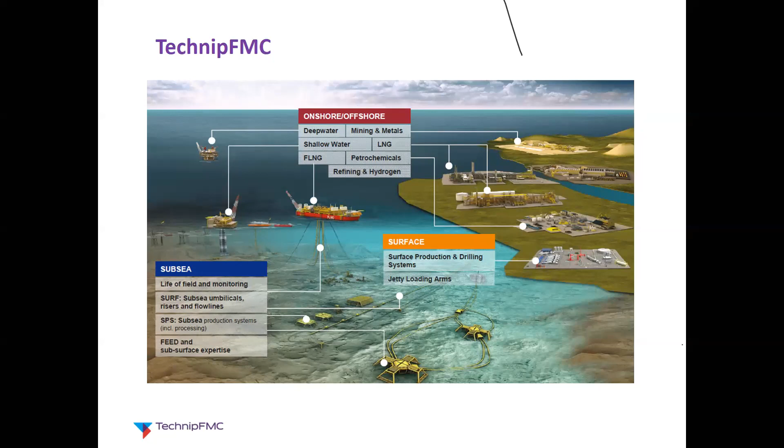We have experience with deep water and shallow water platforms, and the FLNG floating LNG ships. On the onshore side, we have experience in mining, metals, LNG, petrochemicals, refining, and hydrogen. In the subsea, that is below the sea surface, we have businesses in upstream activities like SURF, SPS, and flow lines and other things. On the surface side, again we are into upstream activities, supporting wellheads, jetty loading arms, and all those things. This is the area we are working in.

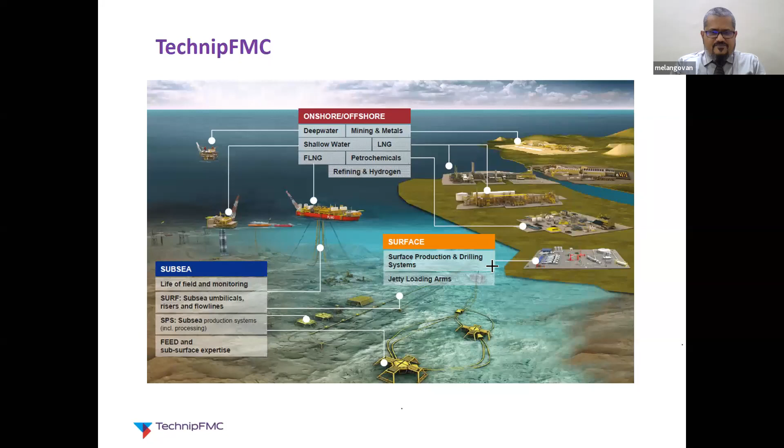Within this organization, I am in the process safety department, looking after the process safety requirements mainly for onshore and offshore projects. So this is the brief introduction for the company. Before going into the webinar, I am putting up some keynotes. This is a presentation where we are going to discuss the introduction. This is not the detailed presentation.

My intention here is to touch upon what are all the process safety activities, typical activities and tools used in the typical oil and gas project. So it will give you the idea of what is what, and it won't give you the detailed one. Given that we don't expect any calculation or exercise in this webinar, so just relax and listen to the presentation and enjoy it.

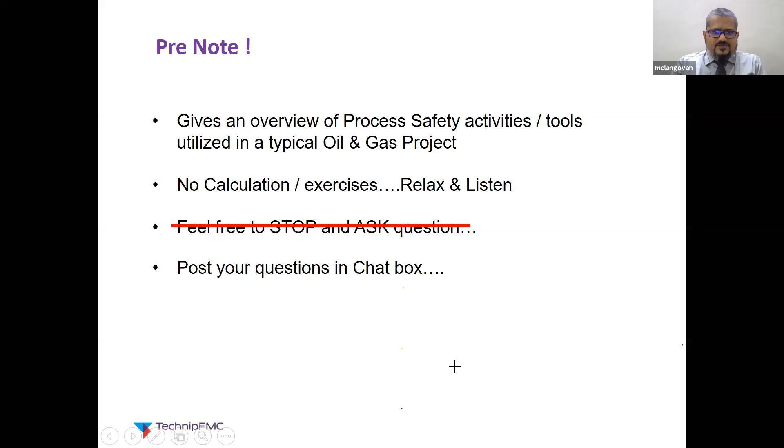So as the attendee of this webinar, what can you get out of it? So, what is process safety? You can get some understanding of what process safety is. And most of the time, people from the field and mainly from other disciplines within the engineering organization confuse process safety with personal safety. So we will give some differentiation, how process safety is different from personal safety.

And the third point, as the title says, we are going into the concepts and tools which are applicable to oil and gas projects. And to get some real-time experience, instead of explaining these tools, why don't we take up a hypothetical project example? Let us assume one project, and we will apply all the tools I am going to discuss in this webinar into that project, and we will see how best we get an understanding of those process safety tools.

So this is the takeaway for you people attending this webinar. Hope you enjoy this session. Let's get into the webinar.

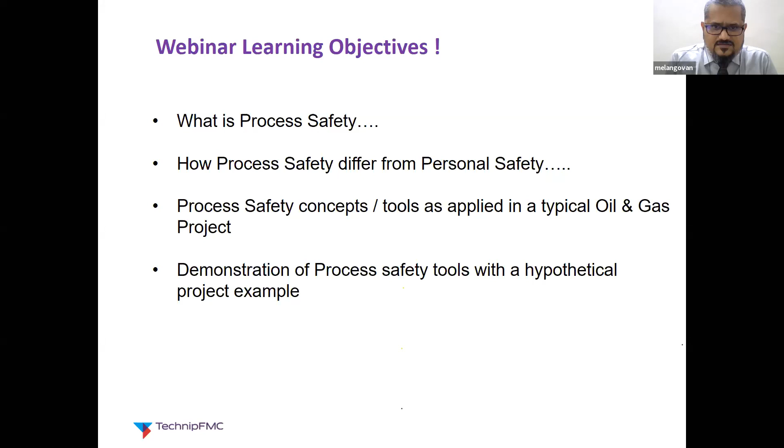So let's define what we are going to define. As the title says, we are talking about process safety. Our first point is to define process safety. So when you just Google this, if you enter 'process safety definition', I am sure you can get thousands and thousands of definitions. This will differ from country to country, organization to organization.

One of the foremost organizations on process safety is the Center for Chemical Process Safety, that is AICHE, which is situated in the USA. One of the definitions from CCPS is the protection of people and property from episodic and catastrophic incidents that may result from unplanned or unexpected deviation in process conditions. So some of the key terms here are unexpected deviation from process conditions. We are running the process for fixed process conditions. If something deviates from that, it may result in an episodic or catastrophic incident, which may result in damage to people and property. Episodic means a chain of reactions, a chain of events, and catastrophic means a sudden damage or other effects. So those incidents are considered process safety incidents. This is one way of defining process safety.

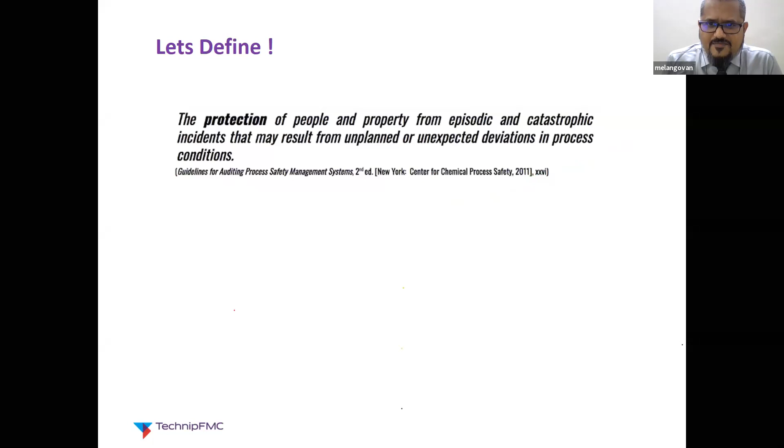To add a little more clarity, I am bringing in one more definition from the Energy Institute, a UK organization working on the HSE aspects of the energy industries. What it says elaborates a bit more on the CCPS definition: process safety is a blend of engineering and management skills. Here the keyword is that it's not only engineering—management also should have the responsibility to implement the engineering things. So it is an engineering and management discipline focused on preventing catastrophic accidents and near misses, particularly structural collapse, explosions, fires, and toxic releases associated with the loss of containment of energy or dangerous substances such as chemicals and petroleum products. The keyword here is loss of containment of energy or dangerous substances. As process safety, we are looking into the areas of how to eliminate the loss of containment of dangerous substances.

Dangerous means it may be flammable or toxic, as I say, it is a loss of containment of energy. For example, if you have a high pressure air receiver, there you have stored energy of high pressure. If something happens to that vessel, if an explosion happens to that air receiver, what will be the damage? So this is not only related to flammables and toxics, this is also related to the loss of containment of energy. So as it says, it is a loss of containment of energy and dangerous substances.

You can say that process safety cannot be applicable only to oil and gas. You can apply these concepts and tools to any industry where you are handling a dangerous substance, which may be flammable or toxic, or where you have contained energy. For example, automobile industry - yes, process safety concepts are applicable for them also because they have pneumatic systems, hydraulic systems, steam, and hopefully fuel gas for heating their furnaces and other things. So these concepts are not only applicable to oil and gas, they can be applicable to any industry where you have this condition, loss of containment of energy or dangerous substances.

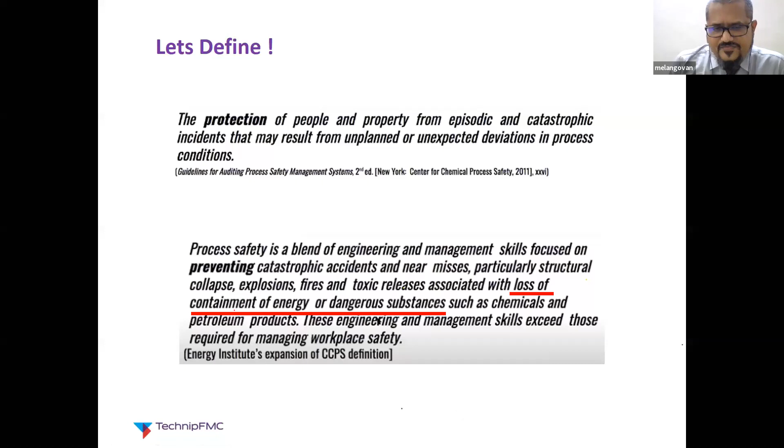I am giving you one example here. This is one cartoon showing a typical industrial activity. As you see in this cartoon, you can find a number of unsafe acts or hazards. For example, there is a chance for this spanner hitting into the person's head - he is not wearing the helmet. This cyclist is parked on the way of escape, and he is standing on the handrails. So you can list out a number of such unsafe conditions or hazards. As you see here, this will be the full list of unsafe conditions.

But can you fit these unsafe conditions into the definition of process safety? What process safety's definition says is it is loss of containment of energy or loss of containment of dangerous materials. By seeing this picture, we cannot say that all these unsafe acts are related to process safety - I say we cannot because we don't know what material is handled in this process section and what are the hazardous properties of those substances. Without knowing this, we cannot define whether these unsafe conditions fall under process safety. But definitely it is sure it is personal safety.

Given that, by seeing this picture, I can point to a couple of acts which may fall under process safety. For example, these two: here you can see that there is a flange missing. If a fluid is introduced in this vessel, that may result in a loss of containment - definitely this is a process safety incident. And here, this flange is hanging in a type of way. If this falls, this dropped object is dropping into live lines, which may result in loss of containment, then I can say that this is a process safety activity.

So by seeing this example, hopefully you can identify and differentiate what is personal safety and what is process safety. As defined, it is a loss of containment of energy or loss of containment of dangerous materials - so this is a key takeaway. Hopefully hereafter you can clearly distinguish what is process safety and what is personal safety.

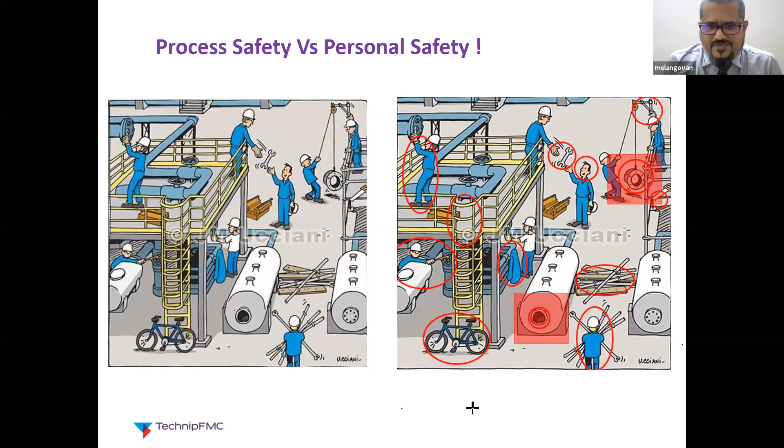I need to fix up what is the capacity of my plant, what are the very basic things, what area of land I require, what is the key equipment for those things. Then the project moves into basic engineering, where some more detail is added into the design, and into the detailed design stage, where everything is fixed up, frozen - the design freeze stage. Then it goes to construction, then commissioning, and after this commissioning, it is handed over to the owner, who is the operator of this plant. The operation is then going on.

After some time, the owner may need to introduce a new product, increase capacity, or address design flaws that occurred in the basic or detailed engineering. Then he goes into the modification phase, where improvements to the plant, asset, or product portfolio, including new products, take place. So this is a cyclic activity of operation and modification.

For every plant, there is a phase where it needs to be decommissioned, because we cannot foresee the demand for the product indefinitely. Generally in oil and gas industry, we design the plant for 20 to 50 years - this is the general philosophy. That means we design the plant to withstand up to 50 years. After that, they need to go for improvement, or decommission and build new. So this is how the typical cycle goes.

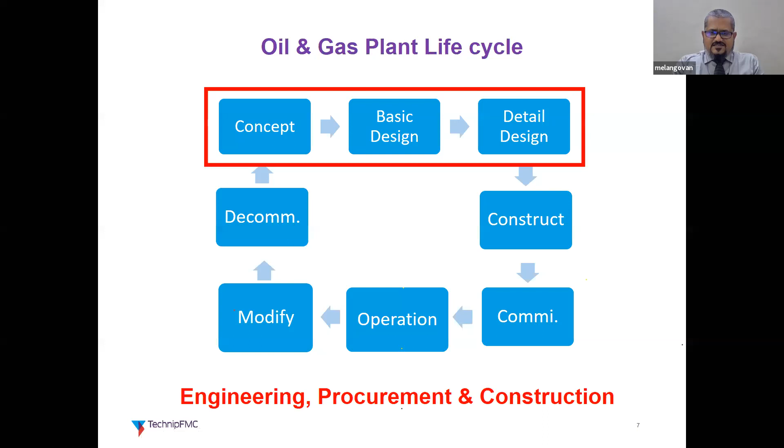Given that, with the title Process Safety Aspects in Oil and Gas Projects, as I am from an engineering company, the whole webinar will concentrate on these three steps of the EPC project: the concept stage, basic design stage, and detailed design stage.

So what are all the process safety aspects typically applicable for oil and gas projects? We will start with the concept stage. The very first thing we implement for the project at the concept stage is ISD review - that is the Inherent Safety Design Review. We will discuss this further in the coming slides.

The next will be HAZID and ENVID, which is typically taken care of in the basic design stage, along with HAZOP and LOPA. This can be taken up in basic engineering as well as detailed design stage, and QRA generally at the detailed design stage. These four things are typical review procedures - what I'm saying is the review procedure assesses how safe the plant we are designing is.

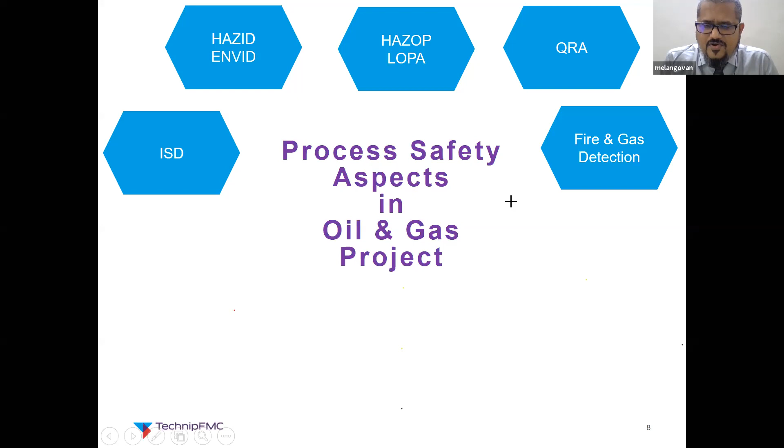Apart from these review procedures, we have fire and gas detection, which is an added protection layer - we'll discuss these things. And hazardous area classification, active fire protection, passive fire protection, engineering control of noise, safety layers - this will give an overview of all the safety concepts applied in oil and gas projects. We are going to discuss all these key elements in subsequent slides.

As I told earlier, we are going to discuss these key elements with the help of a hypothetical project. I am not going to explain this to you as theory - we are going to apply this concept in a sample project. So, are you ready to handle your project, a typical sample project?

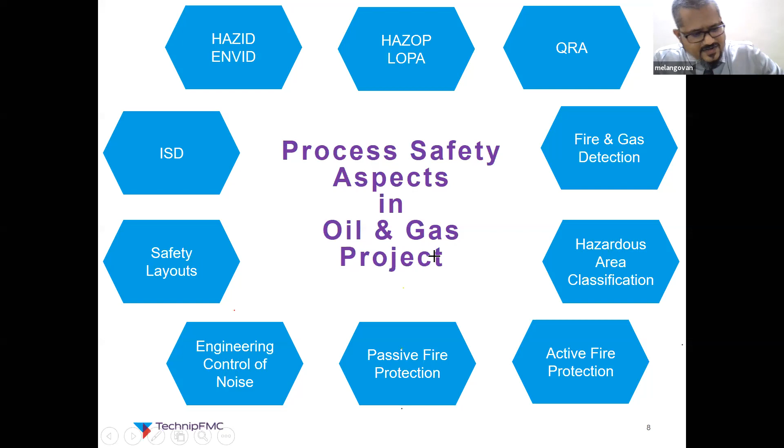Okay, so we have a client who has a plan - he has the idea of putting up a diesel storage system. The task: design a facility to store diesel fuel in bulk and distribute it to various end users. End users means where this diesel is going to be used - typical examples may be the diesel generator, boiler, incinerator, etc. within the plant. So this is the requirement.

Let us assume this is a typical oil and gas project, and this is the client requirement, and we are going to design a safer plant by applying the process safety concepts discussed in the previous slide. Once this requirement comes into any EPC company, the first person to get into the job is a process engineer, who speaks to the client, assesses the requirement, and comes up with the very basic things.

Okay, so now we are entering the concept phase. So what do we have - the client is asking for storage. Typically we need a storage tank for the diesel, which is going to be distributed to multiple end users. End users may be distributed across the plot plan at different locations, so we should have some source to generate pressure so that we can deliver the diesel to the end users.

So obviously we need to have the inlet to the diesel, where we are getting the diesel. And as I told, we need to have the distribution pump and the pipe network to distribute the thing to the different users. So this is a concept stage.

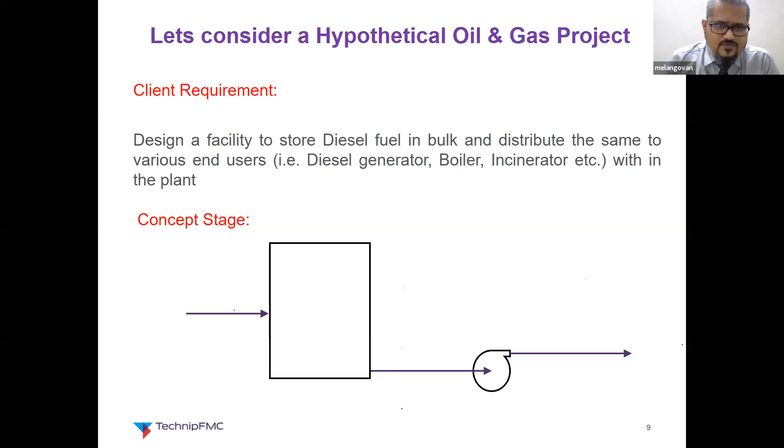We have the inherent safety design review. Let's go for the review. So what is inherent safety? A process has inherent safety if it has a low level of danger, even if something goes wrong. Okay, this is the definition.

There is one very good proverb: if you don't have anything in your pipeline, there is nothing going to leak. That means if your residual risk itself is very less or negligible, then there is nothing harmful going to happen even if something leaks. Okay, this is the concept of inherent safety.

That is minimization. For example, what minimum volume of the tank? This diesel tank can be sized to store diesel for 1 day consumption, 1 week consumption, 1 month consumption, or 1 year consumption. There is no limit for the capacity of the tank, but the risk for each case is different.

For 1 day, for example, it is 100 liters, whereas for 1 week it will be 700 liters. So if a leak happens, in both cases the consequence will be different. For the first case, at worst, we may have loss of containment of 100 liters of diesel. But in the second case, we have loss of containment of 700 liters of diesel. So we need to agree on what minimum size of diesel tank we can have to satisfy the end client requirements.

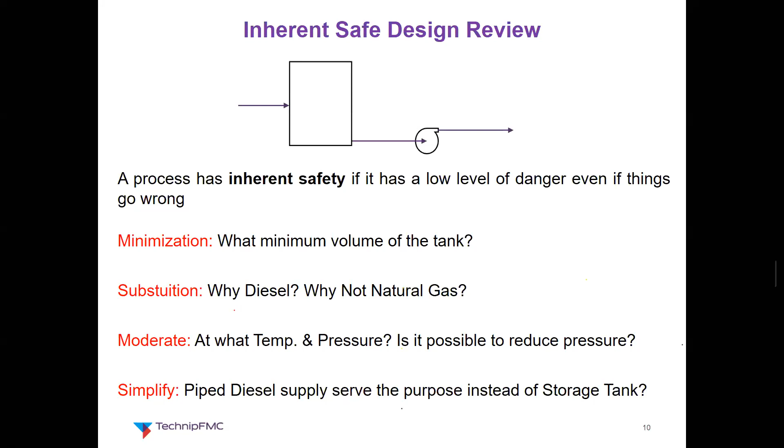Simplify. Again, why do we need this tank and the pump? Why don't we use a distributed pipeline from the source itself? Are we able to eliminate the storage tank or the pump? Is it possible? Because unwantedly we are storing the flammable, combustible material in the bulk storage tank. Are we able to eliminate this thing?

For example, minimization. From the news, you may understand that the tank is around 2,000 or 3,000 liters capacity. Why is such a huge tank required? This huge tank resulted in the prolonged release of styrene. Why is the styrene required? Is there any alternative?

Moderate. What is the temperature and pressure, the operating temperature and pressure of the storage tank? Simplify. Why do we need that intermediate storage tank? Whether we can have the pipe supply of styrene from nearby. This depends on the source where the styrene is coming from.

So this is the way. This ISD, the inherent safety design concept, can be implemented in any project. As I recall again, this concept can be applied to any industry, not only oil and gas. If you take the automobile industry, the same concept can be applied there. So likewise, for any industry it can be applied.

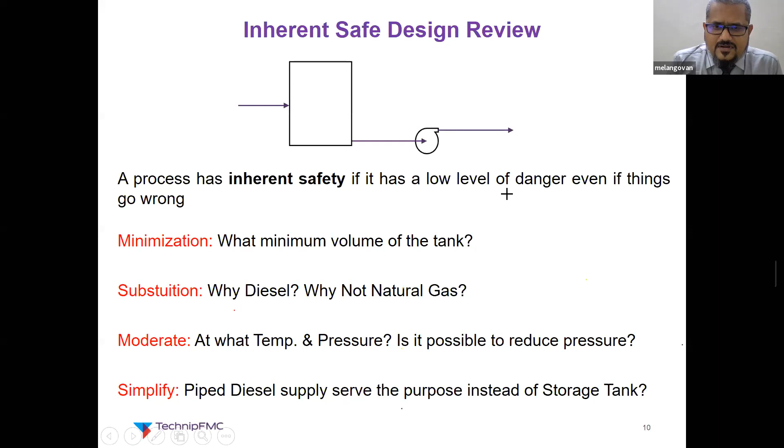Okay, good. We have the ISD workshop completed, and our process engineer is happy. Now the project is moving into the basic design, and our process engineer added some more details to the project. So this is what we have at the basic design. You can see the difference.

I'm just bringing in the concept stage drawing what we had. Now you can see how the project progressed in terms of design. In the concept, we only have the inlet line and the rectangle box with the pump. Now we have a number of improvements to the design. We have decided the tank type will be a simple cone roof tank, and we have added a number of lines and attachments. So this is how the project developed from the concept stage to basic engineering.

Now, perfect. Process engineer comes to me again and asks what improvement can be done from the process safety perspective. Yes, you can do HAZID and ENVID. Okay, let's do it. What is HAZID?

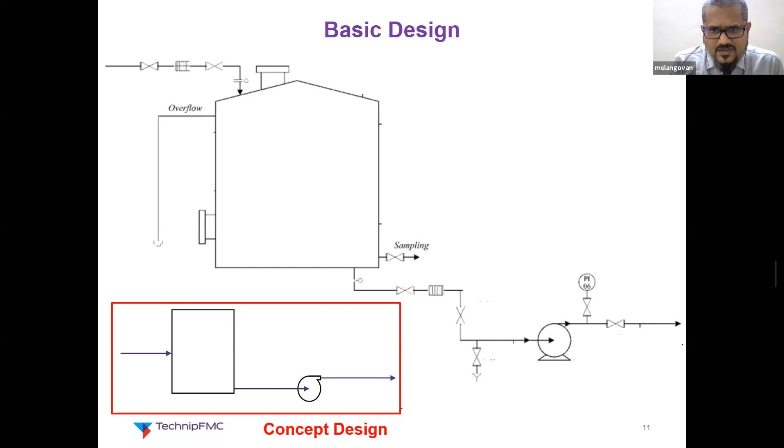The purpose of the HAZID study is to identify the hazards present in the current design and the potential consequences if the hazards are realized. So again, we need to approach this HAZID as a keyword concept.

It is a guide word review. We have a set of guide words from the codes and standards as well as the operating company's procedures. Accordingly, we need to do brainstorming. But when compared to the guide words used in HAZID versus ISD, it is totally different. The ISD concept is to eliminate the hazard itself; here it's to manage the hazard.

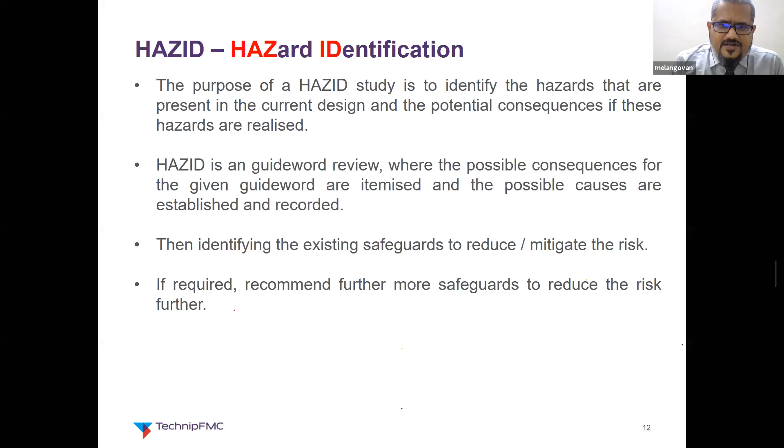That's the way we need to have these guide words. When it comes to ENVID, it is similar to HAZID, but the guide words are more related to environmental hazards, the impact to the environment.

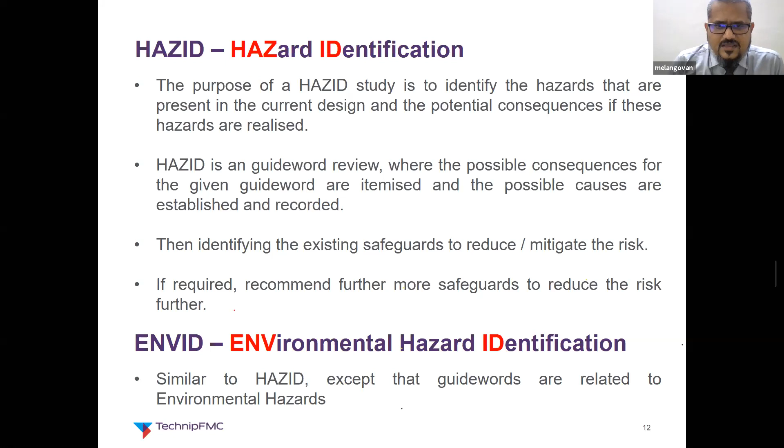Okay, for our case, let's do a HAZID for a simple one guide word. So this is the typical set of guide words we use for HAZID. I'm just giving four. There is a full list of guide words - you can refer to any client document or ISO standards to get the total list of HAZID guide words.

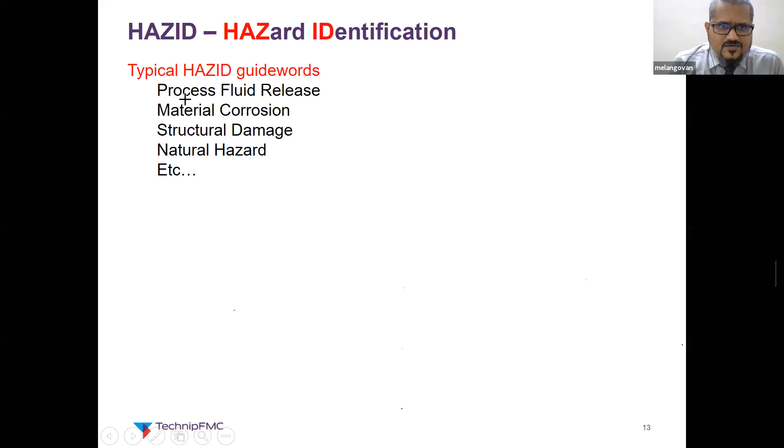Let us talk about process fluid release. So this is a typical HAZID worksheet. The guide word we are talking about is process fluid release. So what may cause this fluid release?

One brainstorming point is rupture of the tank due to corrosion, which may lead to loss of containment of diesel. What is the consequence? Diesel tank rupture will result in loss of containment of diesel, and upon ignition will result in a fire accident. So the loss of containment of diesel won't immediately result in a fire incident.

It should have your ignition source so that it will get into the fire. So what is the safeguard we have to prevent this cause and consequence? At present, based on our basic design, we don't have any safeguards.

So what is recommended? The existing safeguard I can say is the material of construction of the tank, which will be suitably selected, and we have given the corrosion allowance and above the design thickness what we arrived at. So that is one of the existing safeguards we can consider here.

And the recommendation to prevent the consequence: we can provide a bund around the tank. In the current design we don't have the bund, so if the tank collapses, the diesel will spread across the platform until the content is exhausted. But if we have the bund around the tank, we are containing the release within the bund. It is not spreading beyond the bund.

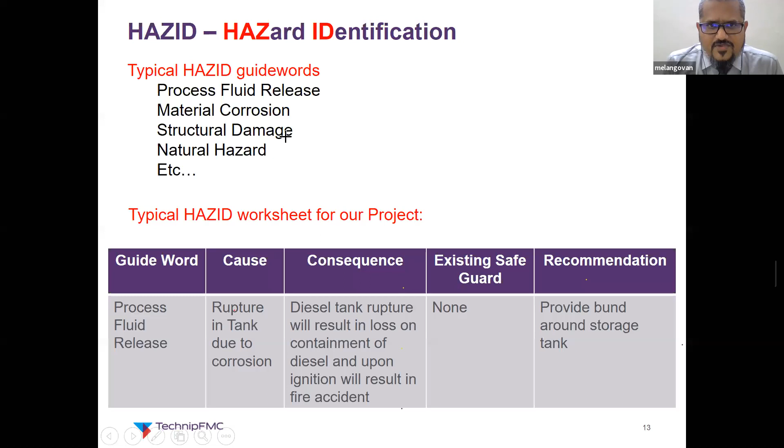And what are the safeguards we have? What is the recommendation? The way we need to brainstorm is for the assets and people and property, as well as the assets for the environment. This is how we are progressing with it.

He had included the level transmitter, the level indicator to measure the level. And he had included the level switch low alarm, as well as the tag numbers here. You can see how this project has progressed from the basic design to the detailed design here.

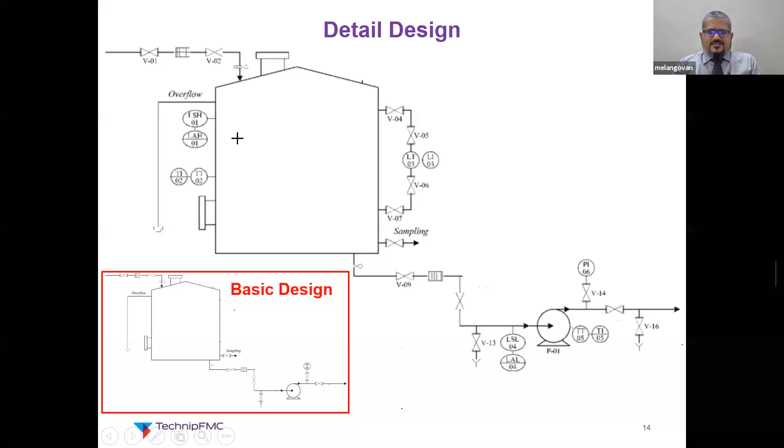See, in the basic design we don't have that - that is not the actual case. I'm just giving you this example to show how the design is progressing. So the main concept is, from basic design to detailed design, the level of engineering detail will be increased. That is the whole concept.

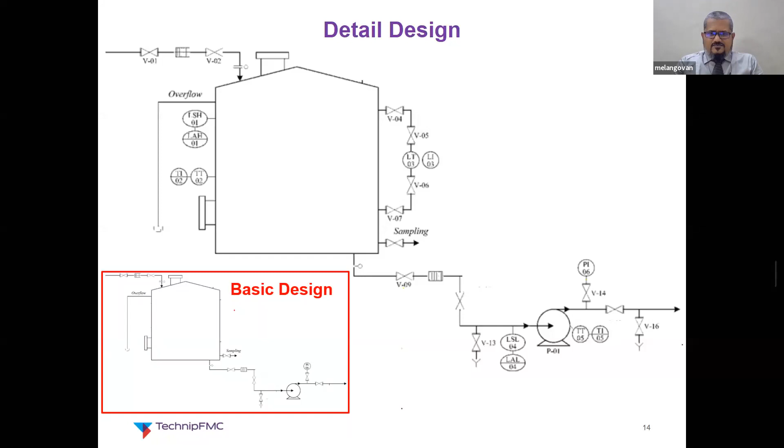So perfect, we have the detailed design. Now, what process safety improvements can I do with the detailed design? Good - we have the HAZOP. Let's do the HAZOP for this process plant at the detailed design stage.

What is HAZOP? HAZOP is called a hazard and operability study. There are two keywords here: hazard and operability. This review not only looks into the hazard but also looks into the operability issues. For example, if I have a strainer on the suction line of the pump, how can I do maintenance for the strainer? What provisions have been given in the design for doing the maintenance? So all those operability issues are also discussed in this. That is the main difference between HAZID and HAZOP.

Okay, in HAZID we look into the hazard perspective; we are not looking much into the operability perspective. But in HAZOP we will look into both hazard as well as operability. So what is HAZOP? A systematic comprehensive analysis of plant design to identify the design gaps which may lead to either safety or operability problems. During the study, the HAZOP team will use a guide word.

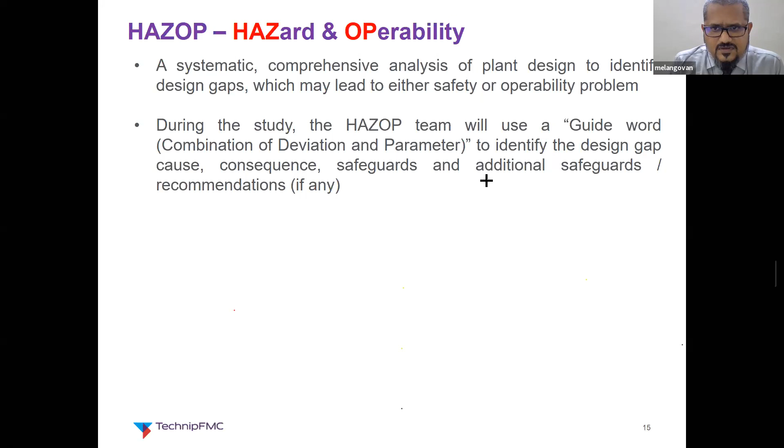Again, it is a guide word, but here the guide word is more narrow. Here the guide word is a combination of deviation and parameter. We are going to see what the deviation and parameter are, to identify the design flaws or the cause, consequence and safeguards. So what is the guide word for HAZOP? How is it structured here? This is the deviation.

So what are all the deviations we can consider, and these are the parameters. Guide word is a combination of deviation and parameter. For example, no flow - that combination is a guide word. Likewise, less flow is another guide word, or more flow, reverse flow. The second parameter is temperature - no temperature won't apply, since there won't be any no temperature, it will be either less temperature or more temperature. Likewise pressure, less pressure or more pressure. Likewise level, less level or more level.

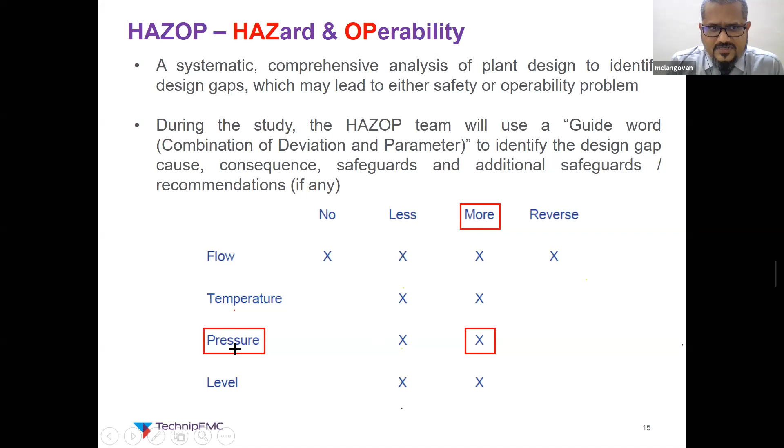So we have the set of guide words now based on the combination of deviation and parameter. Let's do a sample HAZOP for the system we are doing. Let's say we can select more pressure as a guide word. So this is my HAZOP worksheet for the guide word more pressure. So what may cause the more pressure?

I am studying the tank as a node. Before doing this HAZOP study, we need to split the whole process scheme into nodes, so that the HAZOP study will be streamlined, because doing the HAZOP for the entire plant may be too difficult. In our case it is a simple one - inlet line, the diesel tank, and outgoing line. But think about the whole process plant, it will be too difficult. So we need to break the whole process plant into nodes. For each node, we need to apply these guide words.

For example, in our case I am taking the diesel tank as a node, and I am applying the guide word of more pressure to that node. So what may cause more pressure within the tank? For example, while pumping diesel into the tank, the incoming line to the diesel is kept open, diesel is getting into the diesel tank. So what happens? Automatically the vapor space within the diesel tank gets reduced by rise of liquid level, which will result in the increase in pressure within the tank. So for more pressure, the cause will be pumping in diesel will result in more pressure.

So what is the consequence? If I don't have any safeguards, let's see the consequence. Diesel tank may rupture if tank pressure exceeds design pressure. The tank is designed for some design pressure, meaning the tank will withstand up to that pressure. If the operating pressure exceeds that pressure, there is a chance the tank will rupture, which may result in loss of containment. The rupture will result in loss of containment of diesel. Upon ignition, this will result in a fire accident.

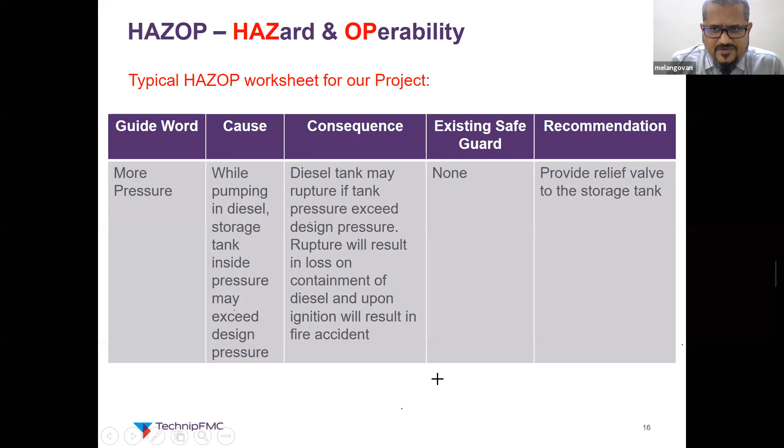So likewise, we need to go through the entire guide words, and we need to brainstorm what is the cause, what is the consequence, what safeguards we have. If we don't have adequate safeguards, we can recommend additional safeguards. This is how HAZOP will proceed. So we have done the HAZOP, and we have improved the process safety of the plant design. And further, we have LOPA, which is called layer of protection.

What is it? This is the concept of protecting the plant by means of an onion model. At the heart of the model is your process design. The very first protection layer is your basic design. For example, in our case we are designing the plant to store and distribute diesel. So what basic design have I followed? I have selected the correct material of construction compatible with the diesel, and I have gotten the correct design pressure to overcome any overpressure scenario, and I have selected the distribution pump to minimize leaks from the seal - I have selected the double mechanical seal distribution pump. So these are all the basic design elements which I have incorporated to prevent any accidents.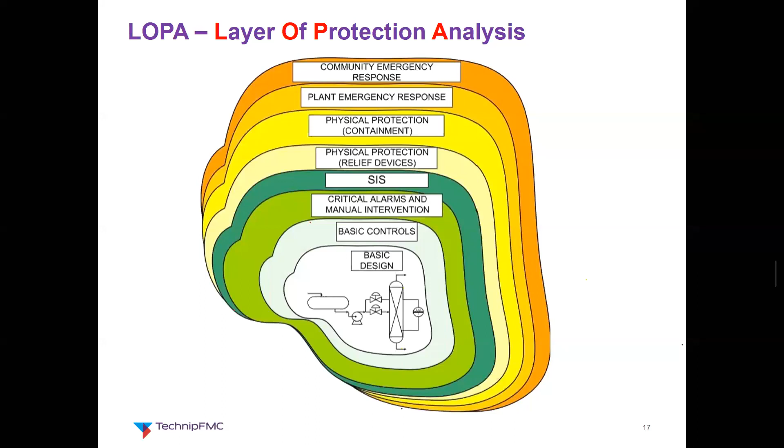So above the basic design, what is the next level of protection? That is the basic controls. Recall that P&ID I showed in the detailed design stage - we have implemented temperature transmitters, level switches, and all this. These are all the basic controls which will keep the process within design limits. And the next level, there are critical alarms and manual intervention. If something goes wrong and this automatic control system fails, the basic control fails, what will be the next level? We have the alarm systems - there is a high level alarm which will alert the operator, prompting operator intervention.

So likewise, we have the low level alarm which will give the protection for the pump against dry run. This is the next level of protection. Above that, we have safety instrumented systems.

What is a safety instrumented system? This is again an automated system, but it is independent of the basic controls. The basic control in our case is the level indicator transmitter within the tank, which will control the level. Above that, we can implement the independent control loop that is called safety instrumented system. If something malfunctions within the BPCS system, this SIS will come into the picture and shut down the system. So that is called safety instrumented system.

And above that, we have the next protection layer. There is a physical protection by means of relief devices to avoid any overpressurization of the tank. And the next level, physical protection again, there is a containment system. As you recall, during our HAZID, we have implemented the dyke.

And above all, if something happens, the loss of containment happens, which may result in fire or dispersion, whatever the thing, what is the emergency response we have within the plant boundaries? That is called plant emergency system. If the consequence is going beyond the plant boundary, there is a community emergency response system.

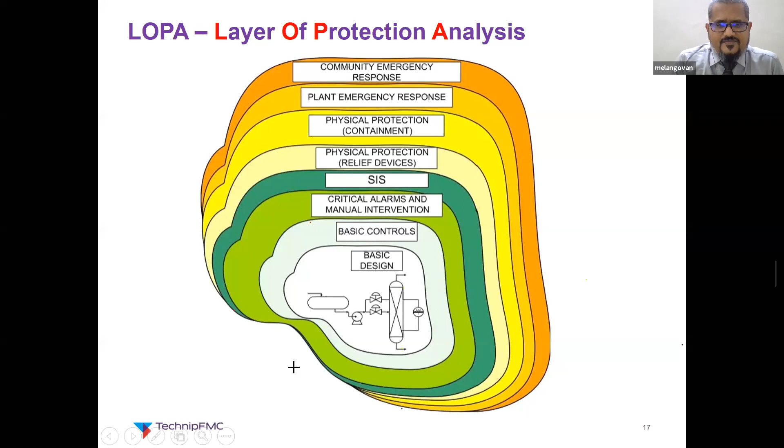So that's where we are getting into the consequence analysis. In our case, for example, with all these protection measures, let a leak happen - the diesel leaks. Then further, what may it result in? It may result in a dispersion, meaning the diesel which leaked out of the system may vaporize and result in a flammable gas cloud.

And a pool fire, if the diesel is ignited, it may result in a pool fire. Jet fire, if the diesel leak is happening as a jet instead of a pool - for example, if the diesel leak is happening on the discharge side of the circulation pump, which is at high pressure, then it will be released as a jet. So if it is ignited, it will result in a jet fire.

And explosion - if the released diesel vapor cloud gets ignited as a cloud, what will be the explosion? In the dispersion, we have both flammability as well as toxicity. For example, again referring to the Vizag incident, the styrene is flammable as well as toxic. Fortunately, there was no fire incident in that accident - it was only the toxic cloud. So we need to assess all these things.

So how are we going to assess this? We have sophisticated software for doing this job. One of the software is PHAST.

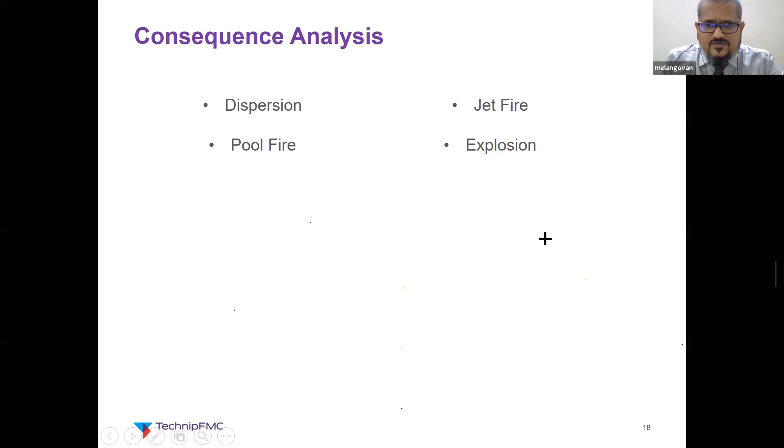Based on this overpressure, we need to locate our buildings and other vulnerable objects outside this explosion overpressure criteria. This consequence analysis will help you plan your plant emergency system as well as community emergency response systems. For example, if your consequence says this distance for dispersion, pool fire, jet fire, explosion, and all this distance is within my plant boundary, that means it is not traveling beyond the plant boundary.

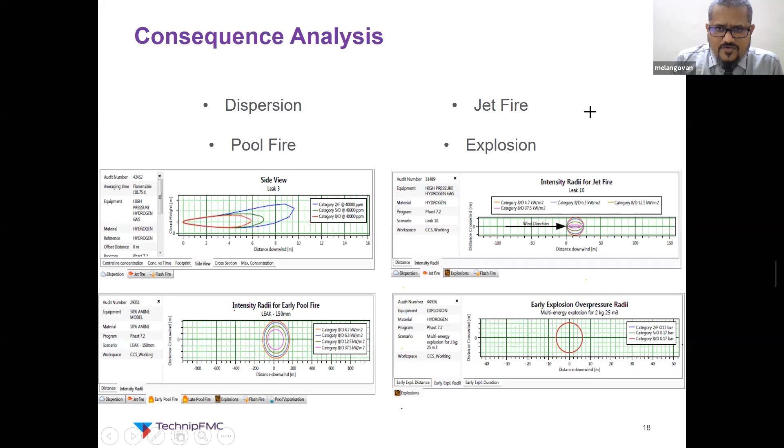So we need to develop the plant emergency response plans accordingly. If it is going beyond the boundary, we need to look into the community emergency responses. With this, we are moving to the next concept.

By saying quantitative, now we are getting into numerics. Up to this point, from the start of my presentation, I have been speaking generic terms - hazard, dispersion, fire - but not in terms of numbers. For example, if fire happens, how much distance will you see the radiation of so-and-so level, or how much distance the LFL will happen. And again, if a fire happens, is it affecting people, and if so, how many people are affected? Those things will be dealt with in the quantitative risk analysis or assessment.

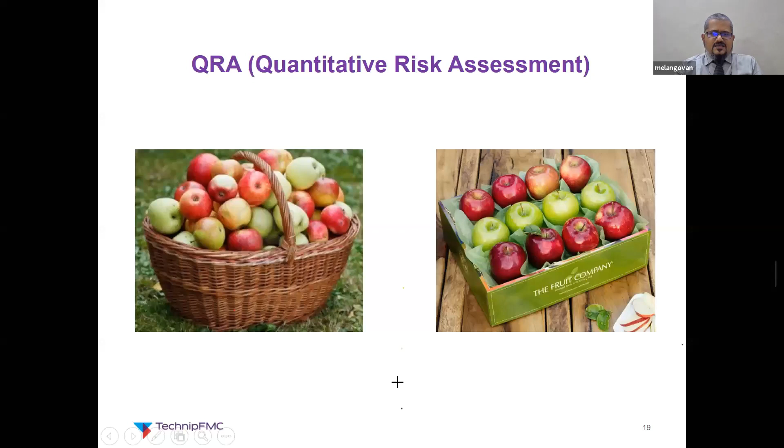So what is this QRA? QRA provides a numerical measure of the risk a facility or operation poses to the public, to site workers, or on-site and/or off-site equipment. So by definition, risk is a function of frequency and consequence.

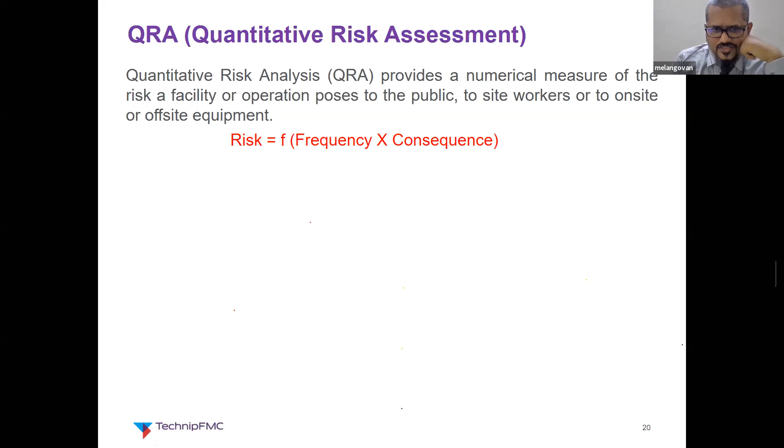Consequence, as discussed in the previous slide, is a function of the properties of the material handled. For example, is it flammable or toxic? If it's inflammable, what is its flash point? Is it easily ignitable or less ignitable? Likewise, leak hole size - what is the hole size where the leak is happening - and isolated section volume. For example, if we assume the leak is from a diesel storage tank, what is the capacity of the diesel storage tank?

If you recall, at the start of the webinar, I mentioned that if the tank is 100 liters capacity, the consequence will be less. If it is a 1000 liter capacity, the isolated section volume is high, so the consequence will be severe. Consequence is a function of all these things. I've listed a few here, but likewise a number of other things are there.

Likewise, frequency is a function of leak frequency. For example, the diesel tank leakage - if a leak happens, how frequent can it be? What are all the leak sources? All these things will be assessed in the leak frequency.

Once a leak happens, it doesn't get ignited every time - we should have some probability of ignition. It may ignite or may not ignite depending on a number of factors. Likewise, there's the probability of human presence at the time the event occurs. Even if it is ignited, does it affect the person or not? That depends on whether the person is standing at the time the fire is happening, or is stationed somewhere away. A number of factors need to be studied to get into the risk.

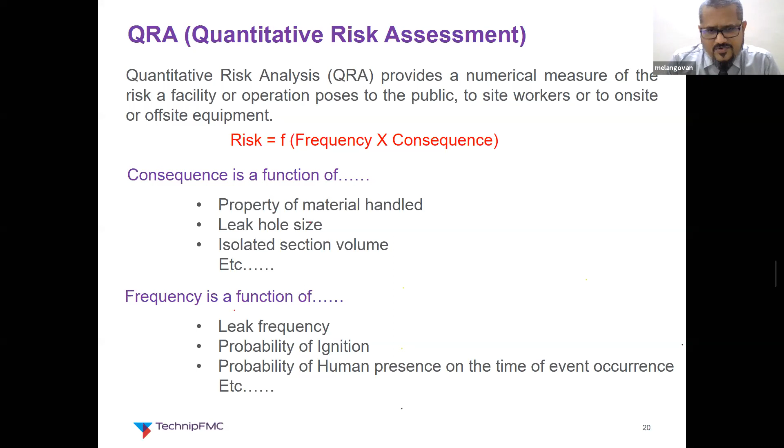So what I did is include the ESD valve - emergency shutdown valve - which can be activated during the leak scenario. For example, let's assume there's a leak happening downstream of this line. If you don't have this valve, it will just continue, because these valves are manual valves. Remember the Jaipur incident, the IOCL Jaipur incident, the tank pump incident - they had valves, even motorized valves, but they needed to be activated on site. It cannot be activated remotely from the control room. A person needs to go to the site and push the button.

Unfortunately, before that site activation happened, the diesel released from the tank had formed a flammable gas cloud, so no person could enter the tank area. So what happened ultimately? The entire tank content leaked out, which resulted in a massive fire incident - a costly lesson learned for India.

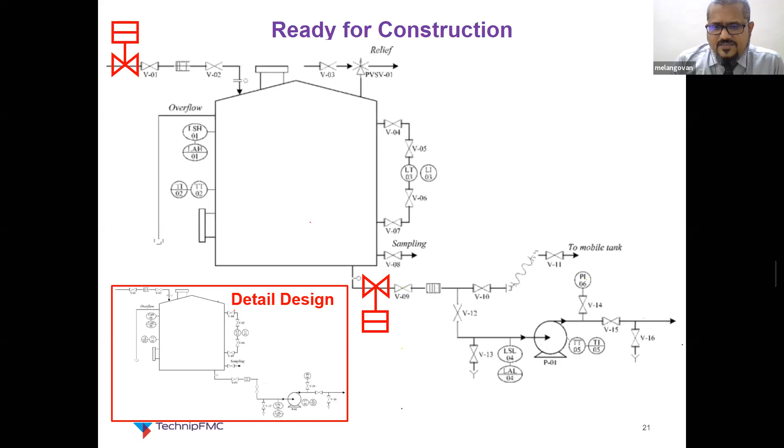This is how the project matures from concept to construction, incorporating process safety aspects and tools - but these are all review tools. Apart from that, up to this point we've concentrated on how we can avoid the loss of containment, or how we can avoid hazardous events. But there are some more layers available to minimize the consequence. With all these protection measures, if something still happens - some loss of containment - how can I minimize the consequence effects? That's what we're going to discuss further.

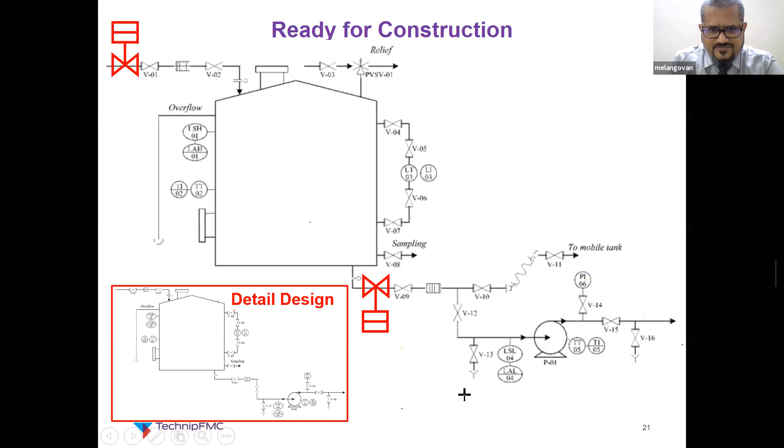The first thing is the fire and gas detection system.

So whenever there is a leak, the very first protection layer in place is the fire and gas detection system. If it is a volatile component or a gas, we have gas detectors which will give an alarm to alert the operator. Or if it is converted into fire, then we have fire detectors.

Now let us implement these systems into our design. Before that, we have listed down all the detectors available. For fire, we have three types: flame detectors, smoke detectors, and heat detectors.

Flame detectors work on the principle of optics, by seeing the flame. Smoke and heat detectors are based on the product of the fire. The product of fire is smoke, so if there is smoke, there is fire. Likewise, if you measure heat, there is fire. So these two detectors are based on the product of fire, while the flame detector detects the fire itself.

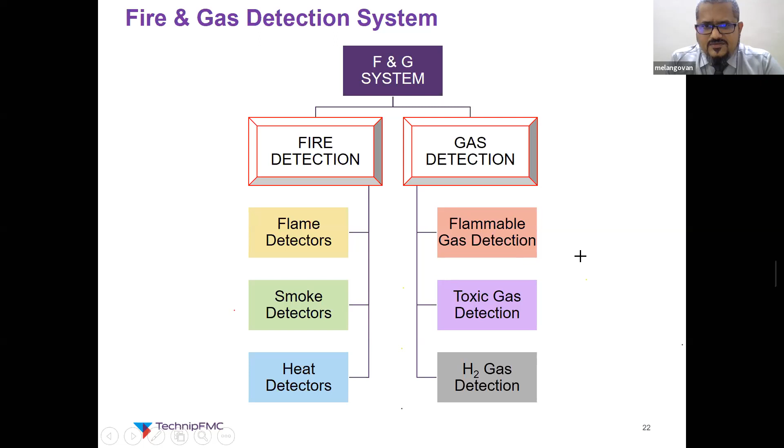Likewise, for gas detection, we have flammable gas detection, toxic gas detection, and H2 gas detection, or any specific gas detection we can implement. So now, how do we implement this into our system?

We have this ready for construction plan. Now I am going to implement the detectors. First I have implemented flame detectors: two to cover this tank, and two for this pump. Why? This is a possible leak source, the mechanical seal and other things. This is a possible leak source where we have an overflow line. That's why I have placed my detectors around these two possible leak sources.

Likewise, I'm placing my gas detectors, again on the pump, which is a possible diesel leak source through the mechanical seal of the pump. This looks simple for this system, but for a whole process plant it will be a laborious job, requiring expertise and skills for placing these detectors.

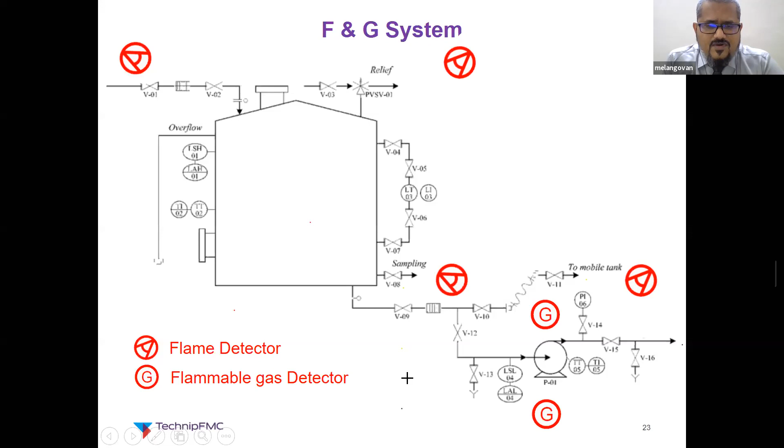Okay, what next do I have? Hazardous area classification. What is it? If a leak happens and the fire and gas detector fails to act or detect somehow, there is a next consequence: maybe the flammable cloud may get into a fire.

This is a typical fire triangle. Everybody knows about this, hopefully. For any fire, we need oxygen, fuel, and an ignition source. Fire is a reaction between fuel and oxygen, an oxidation reaction, you can say. To initiate that reaction, we need an ignition source or energy.

So what are we going to do with hazardous area classification? For any process, we cannot eliminate fuel and oxygen. For example, in our case, diesel is a combustible material, a fuel. Our whole purpose of the plant is to handle this diesel, so we cannot eliminate it. Likewise, oxygen is everywhere in the atmosphere, we cannot eliminate that either. So the only possible thing is to control the ignition sources.

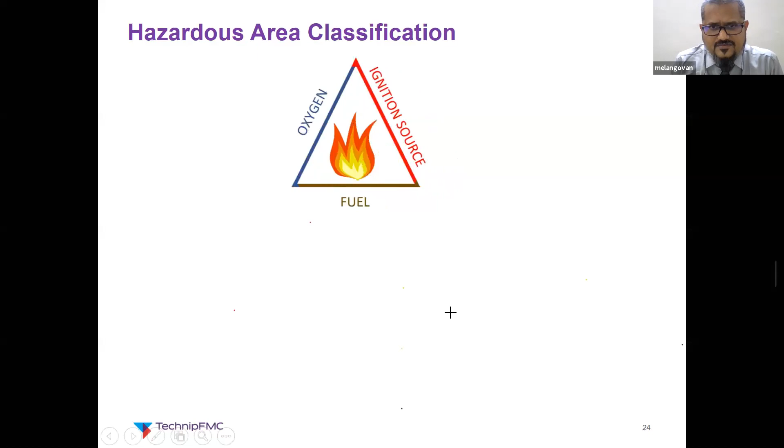So how is this ignition source related to hazardous area classification? First let's look at the definition. What is hazardous area classification? A hazardous area is defined as a three-dimensional space in which a flammable atmosphere may be expected to be present.

So what we are going to do is define what may be the flammable atmosphere around my system, based on the material I handle, its flash point or physical properties, and the operating temperature and pressure. So I am defining the flammable three-dimensional atmosphere around my system, and then I need to control the ignition sources within that three-dimensional cloud.

So what ignition sources can I foresee? Any open flame - for example, I cannot place a diesel tank near a fired heater or furnace, because there is an open flame, which is an ignition source. Likewise, I cannot place normal electrical items into that flammable cloud, since normal electrical items are prone to generating sparks. So I need specialized electrical items.

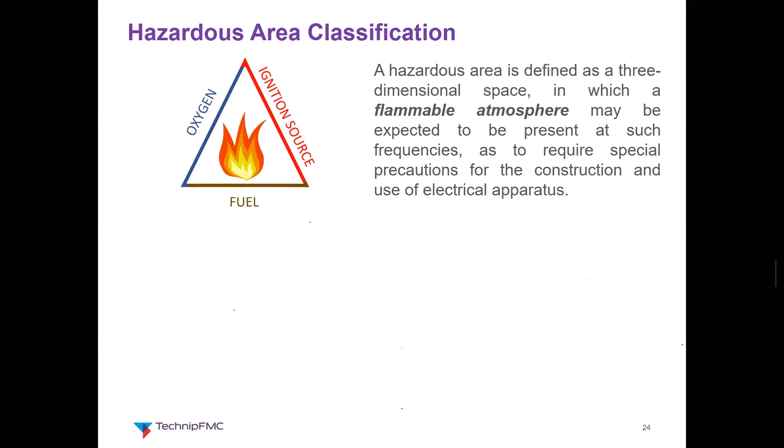So we are going to first define the flammable atmosphere, then control the ignitable sources that will be present within that flammable atmosphere. How can I define that flammable atmosphere? We have process standards for this, and it is actually a separate subject for discussion, so I'm just giving an introduction to it.

So what we are going to do is zone classify my system. What is zone classification? Zone 0 corresponds to a part of the hazardous area in which a flammable atmosphere is continuously present.

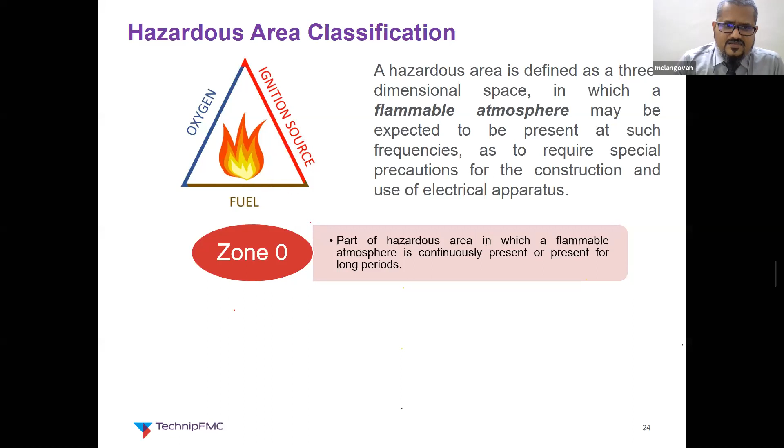That is 24/7, there is a flammable atmosphere. Flammable atmosphere means we have the fuel as well as the oxygen. If that is there, I am defining that as zone 0. Likewise, zone 1 is likely but not 24/7 - in a day, sometimes it is available, sometimes it is not. Likewise, zone 2 is not likely to occur during normal operation, however it is existing.

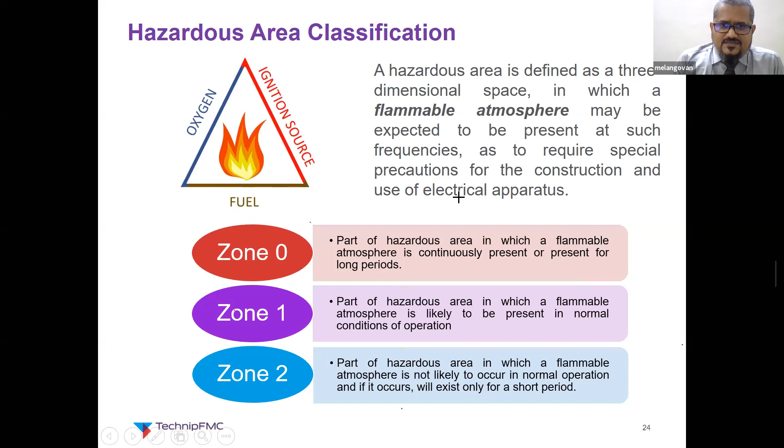With this, let us do the zone classification for our system. I'm just copy pasting from the code. So this is my diesel tank, this is the diesel liquid level inside the tank. Above the diesel tank, there is diesel vapor as well as air, because the diesel tank is open to atmosphere - remember the overflow line and the relief valves, which are all open to atmosphere.

So when I pump out the diesel, the liquid level will go down, and at that time outside air will get into the tank. When I pump back the diesel, the level will increase, and at that time this space will have air as well as diesel vapor. That is 24/7, we have the flammable atmosphere, so inside the tank we should have zone 0.

Remember the relief valve - it will activate whenever there is overpressure, and whenever it activates, it is releasing the diesel vapor. In that case, we don't have the diesel vapor 24/7, but it is likely, so I am classifying this area as zone 1.

And zone 2 is not likely available during normal operation. For example, if there is a leak in the level gauge, the diesel leaking will result in a vapor cloud. So around the tank, I am classifying as zone 2.

Once this is done, the electrical people will get into the picture. They will select the electrical apparatus according to the classified systems. So we have completed the hazardous area classification, one improvement on minimizing the consequence.

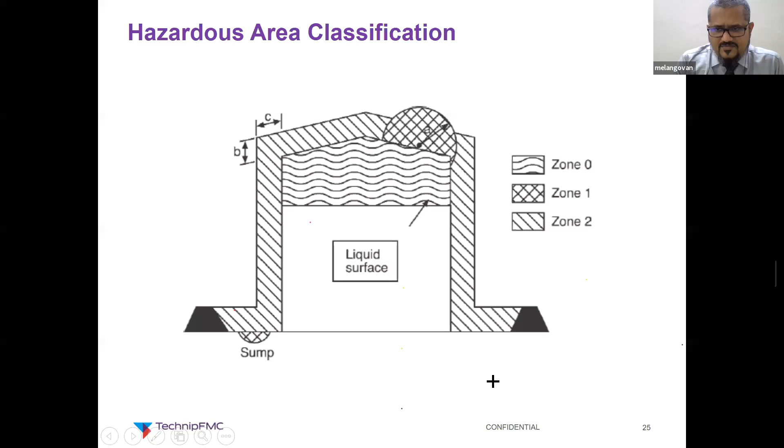What next do we have? Active fire protection. What is active fire protection? Active fire protection system is defined as those systems wherein an action must be executed, either manually or automatically, before the system will operate.

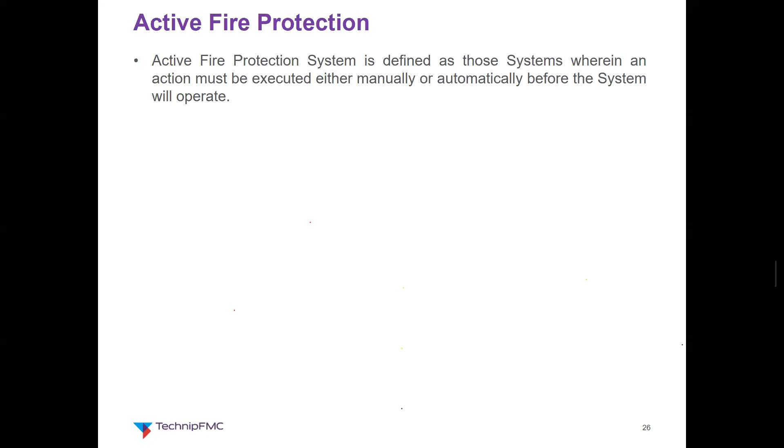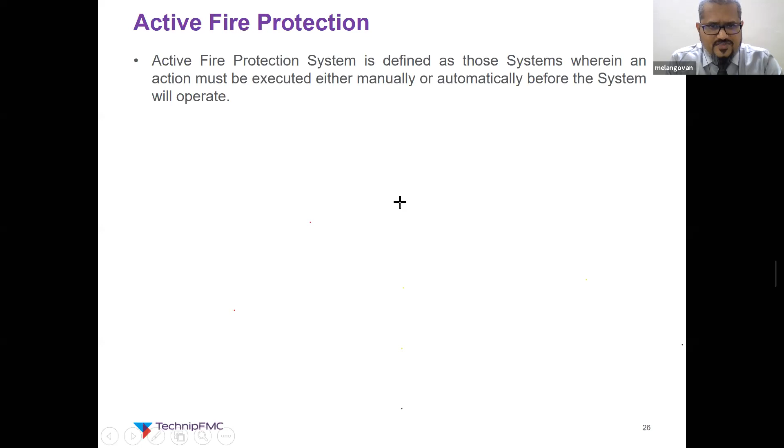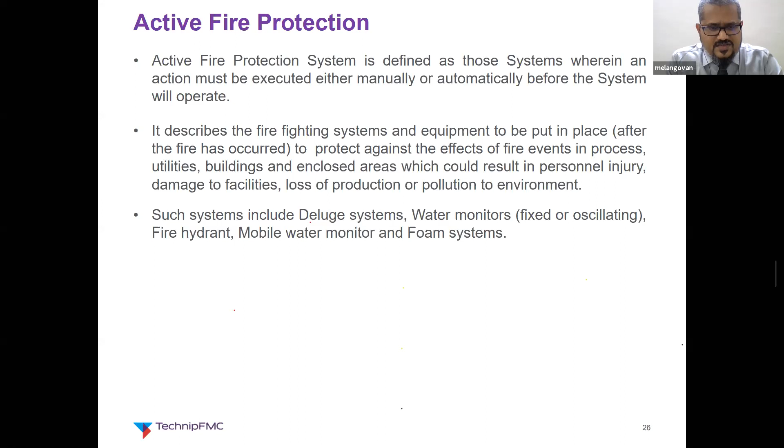So we have the next protection layer, that is the active fire protection system. If above all, a fire happens, how can I minimize the damage happening due to the fire - this is where the active fire protection system comes into the picture. It describes the firefighting systems and equipment to be put in place during a fire incident. Such systems include deluge system, water monitors, hydrants, mobile fire monitors, and foam systems.

So this is the typical fire water system. It starts with the fire water tank, which is sized in such a way to fight a fire for the defined duration, and it has the jockey pump and the fire water pump, and we have the delivery system into a loop network where we have the monitors, deluge, and hydrants. This entire system is pressurized with the jockey pump running.

So there will be a set point. Below the set point, it will automatically start the fire water pump. If the jockey pump is not sufficient to maintain the pressure, the fire water pump will automatically start and will supply the fire water.

In this system, we have monitors and hydrants, which again need to be activated manually. The person needs to go and connect the hose to the hydrant, then direct the water hose into the fire. Likewise, for a monitor, the person needs to go into the field and move the monitor nozzle in such a way to fight the fire.

And in deluge, again we have manual activation as well as automatic activation. Deluge is something like pouring water with immediate effect all around the equipment. Again, the study and design of this system is something that could take an entire day or multiple days to get into, but this is the very basic - we have the active firefighting system as a protection layer.

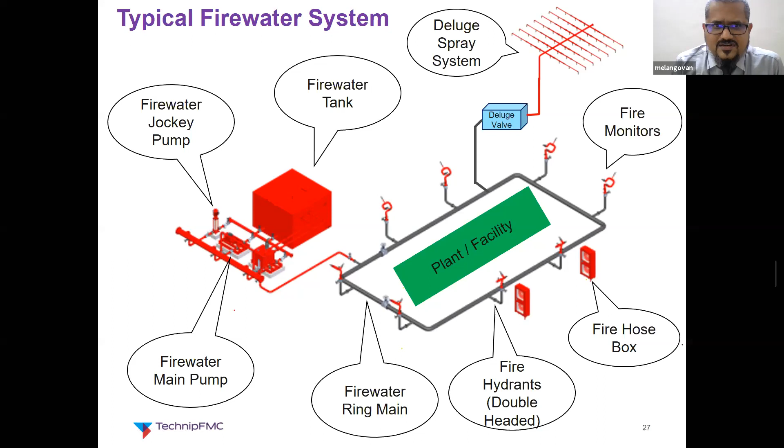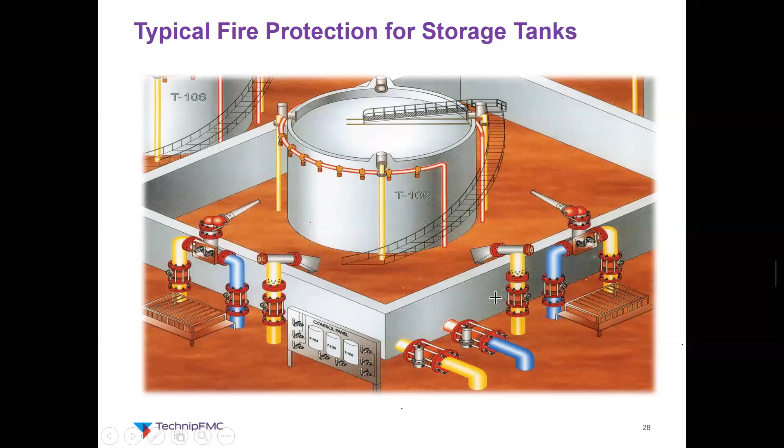Likewise, we have the foam pourers for this tank. If this tank is a floating roof tank, this example is a floating roof tank, so we have the foam pourers above it. So this is how the typical system will look like when we have the complete design for this fire system.

With this, our next protection layer is passive fire protection. What are we going to do in passive fire protection? What is the difference between passive and active fire protection? Passive fireproofing is for protection against the adverse thermal effects of fire for a limited period and limited degree of exposure. It is a protective measure to improve the capacity of equipment and its support structure to maintain its structural integrity. Any fire will result in the reduction of structural ability of the metal components.

If the metal component is exposed to the fire, it will eventually lose its strength as the temperature increases. What we are going to do here is apply the protective coating over the metal surface so that the heat input to the metal structure is limited.

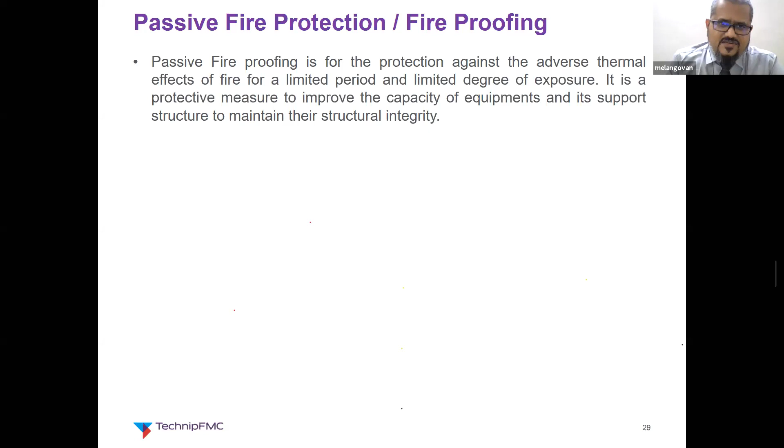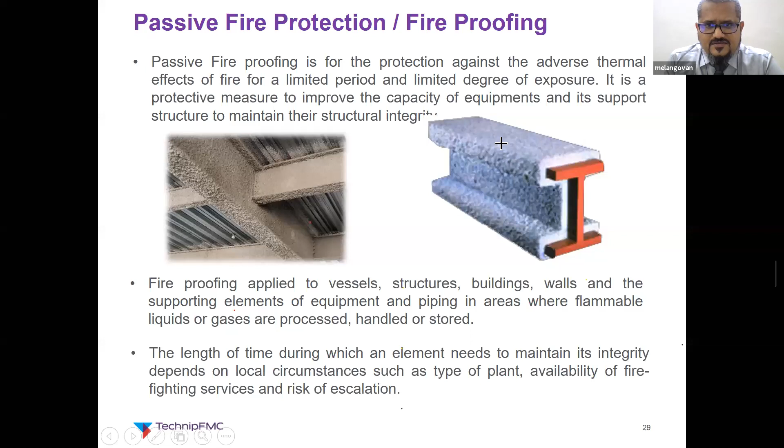Fireproofing applied to vessels, structures, buildings, walls, and pipe supports, where we have flammable material containing systems. The length of time during which an element needs to maintain its integrity depends on local circumstances. The type of coating selected is based on how much time I need to protect this member, and how much heat gradient it needs to withstand. All those factors are the defining factors in selecting this PFP coating material.

With this, I am moving on to the next layer, engineering control of noise. Generally, people consider noise as an occupational hazard. Yes, it is an occupational hazard. However, prevention of this noise requires an engineering control. That cannot be controlled by occupational safety measures alone. We need to take it during the engineering stages. That's why it is considered part of the process safety activity in the engineering sector.

So what is the limitation? The normal limit is 90 dB and 115 dB for occasional exposure. For example, if we have a PSV which is releasing once in a while, at that time we can exceed this 90 dB normal limit. But even that, we cannot exceed 115 dB.

So these noise levels we need to assess during the design stage. For example, in our case, we have the pump, which may result in noise, and we need to ensure that the diesel distribution noise level is within this 90 dB. If it is exceeding, what I can do is go with acoustic enclosures, so that the outside noise will be limited to 90 dB.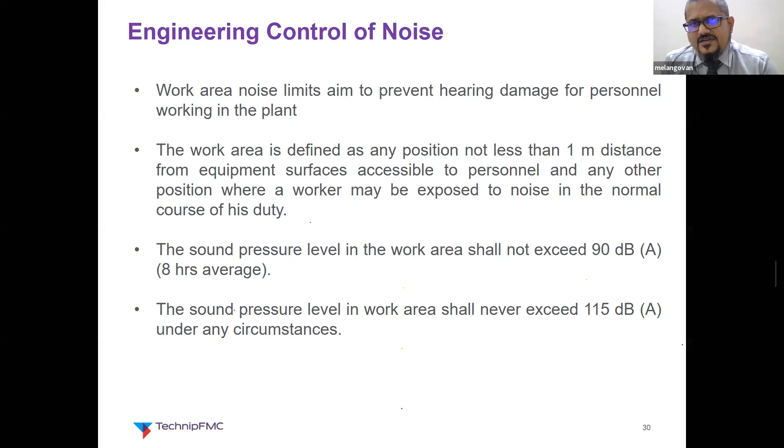So that is another protection layer. Again, it is not exactly process safety, it is occupational safety, however it is considered as part of process safety also.

With all these things, we have discussed a number of tools and activities. So how can it be delivered to the downstream engineers or to the clients by means of safety? Hazardous area classification layout, where I will show all my clouds. Gas detector layout, where I will show the location and type of detectors. Active fire protection, which shows the location of my firefighting system, monitors, hydrants. Likewise, passive fire protection layout, which will show which members need passive fire protection. And noise zone layout, which shows which is the high noise area and which is the low noise area.

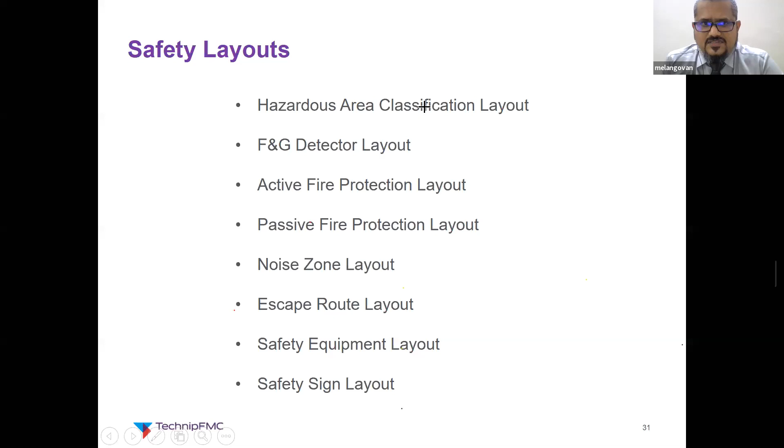In high noise areas, we need further occupational protection. Escape route layout—if there's a fire incident, what will be my escape route. Safety equipment layout, like portable extinguishers, which I have not covered yet. Safety sign layout—these are all the minimum layout things I need to do as a process in this project. Okay, with these things we are almost at the end.

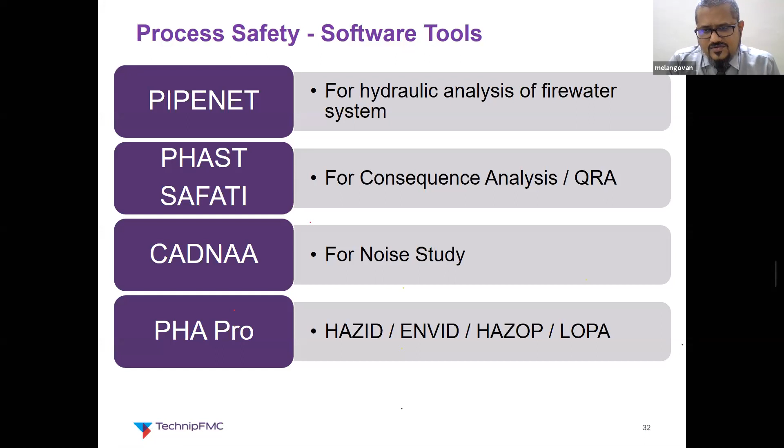What kind of software do we use as a process safety engineer? PIPENET—this is the software we use for fire water system design and hydraulic analysis of the system. PHAST SAFETI is for consequence analysis, QRA. CADNAA is for noise study. PHA Pro is for HAZID, HAZOP, LOPA—any review process, we can use PHA Pro to record the things. It's something like Excel, but a more sophisticated software.

So with this, I am finishing my webinar. We are at 7:40, 10 minutes over—I have taken extra time. Now I am giving it back to Gokul. Gokul, I am ready to answer any questions.

Yes, sir, thank you so much for your informative and wonderful session. I think so many safety concepts we have seen here, and protective methods also, and the basics—it's an introduction, so we need to learn more. Definitely, I think today our fellow engineers and participants would have enjoyed it much, and we have quite a number of good questions. I think there are some chemical engineers also, more chemical engineers are there. I will just read out a few of the questions. Okay.

Okay, this is from Balamurugan. How far will carrying out the QRA at the concept stage help me design a safer facility, especially for the given scope of work? Just to contemplate the use of QRA in various phases of the project life cycle.

Okay, doing QRA at the concept stage—when I look at QRA, I am looking for detail. For example, I need to calculate the leak frequency. Leak frequency means I need to look into the P&ID—what are all the elements I have in my piping system. For example, if I have a valve, that's one of the leak sources—the stem of the valve is prone to leak. So to calculate my leak frequency, I need the entire detail of my system, which is only available at the detailed design stage. As you see in the presentation slides, at the concept stage we only have the key elements, key equipment—we don't have the detail. So if I do the QRA at the concept stage, that may not give correct results.